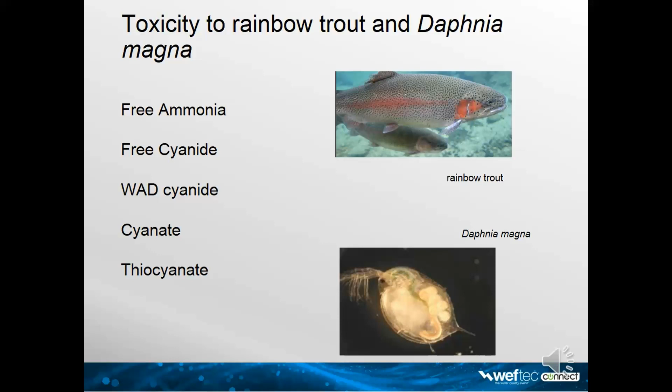This has two impacts. The first impact is that ammonia nitrogen, as we said earlier, is toxic by itself, so it needs to be taken into account when estimating how much ammonia nitrogen is going to be released in the environment. And the other impact is that it increases the load of ammonia nitrogen that needs to be treated. So this has an impact on the physical design, how big a reactor we must have to treat the ammonia nitrogen.

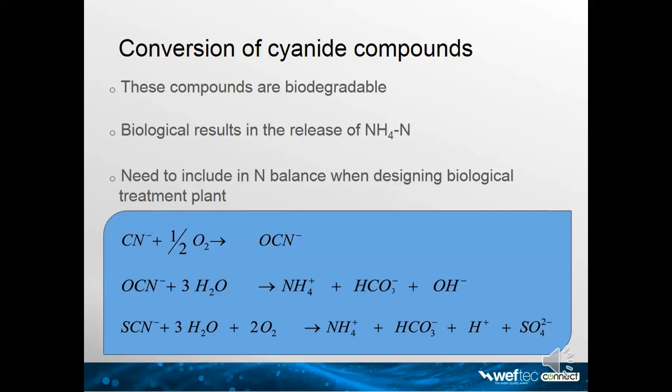In this specific case, the contribution of the cyanide compounds was roughly the same as the contribution of the free ammonia coming in the effluent. So basically, without taking this into account, we would have significantly undersized the reactor at the plant.

It was not immediately obvious when we were in the early phase of the project what was causing the toxicity of the water at Eleonore mine. There was an existing treatment plant. The treatment plant was removing metals. In this case, it was mostly copper and arsenic that were the two main metals present, and they were removed at levels way below the toxicity limits.

We started to suspect that ammonia was an issue. We tested at lab scale a biological process to remove the ammonia. We found that actually, yes, ammonia was a constituent of the toxicity. We found, however, that even when removing completely the ammonia, there was still some toxicity, mostly for Daphnia magna, the greater Daphnia. And we found that actually we needed to design the treatment system to remove both components to be able to remove that toxicity.

There were tests done using stuff like zeolites to remove only the ammonia. It actually worked fairly well, but because zeolites do not remove cyanate, at the end of the day we could not use that to actually make the effluent non-toxic.

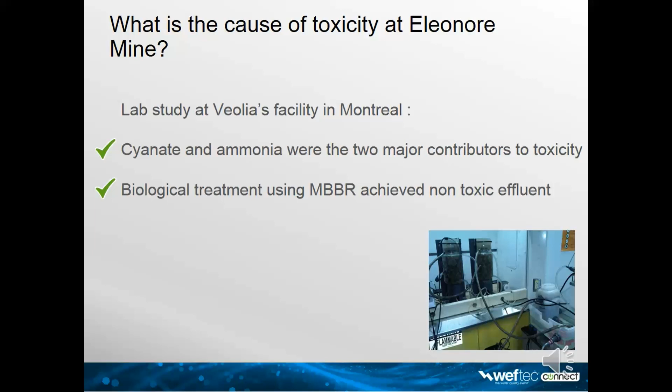On-site demonstration was undertaken for about 6 months, starting late fall, going into early spring. So we went through the winter season. We wanted to demonstrate that the process actually worked with variation in the water temperature and water composition as it is in real life. We demonstrated that we could actually treat the water at low temperatures.

And so we managed to demonstrate that once the media is seeded with biomass, the system is fairly robust and able to restart after unexpected upsets. That was actually pretty comforting for the client because he knew then that if stuff happened, they could restart fairly easily.

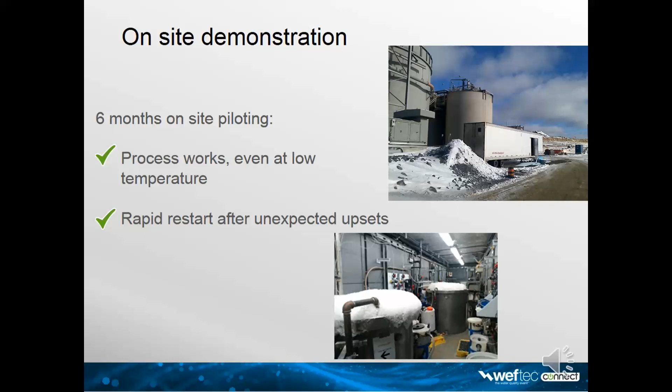The process at Eleonore that we implemented is a fairly simple process. As I said earlier, we already had a treatment system to remove metals. So it's high pH metal precipitation on the left side, which is mostly in this case copper, but would be also zinc and nickel. There's actually very little zinc and nickel in the effluent. It's mostly copper. And on the right side, there is a neutral pH metal removal, which in this case is mostly arsenic. The ore at the site does contain a fairly significant amount of arsenic, so it's something that actually needs to be removed.

We added provision to heat the water if required. That's both to increase the capacity of the system if it is required, and also to prevent freezing in winter, because this operates 12 months per year. So we installed a boiler and heat recovery using heat exchangers. And then we went with the two-stage MBBR. The first stage MBBR is to remove the cyanate and thiocyanate, and the second stage MBBR is for nitrification, to remove the ammonia.

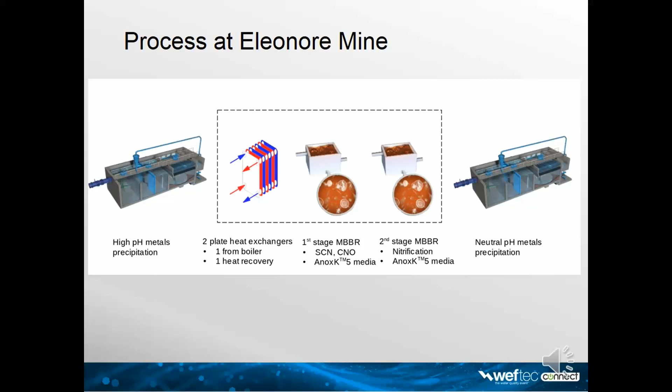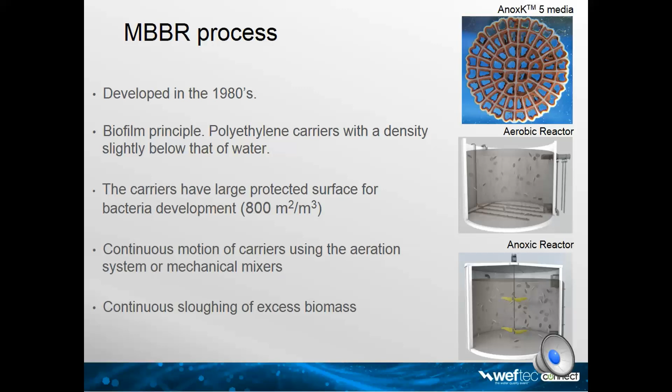Using fixed film technology allows specific bacteria to develop in each reactor. For example, we have nitrifying biomass in aerobic reactors and denitrification in anoxic reactors, and each biomass can operate under its optimal conditions.

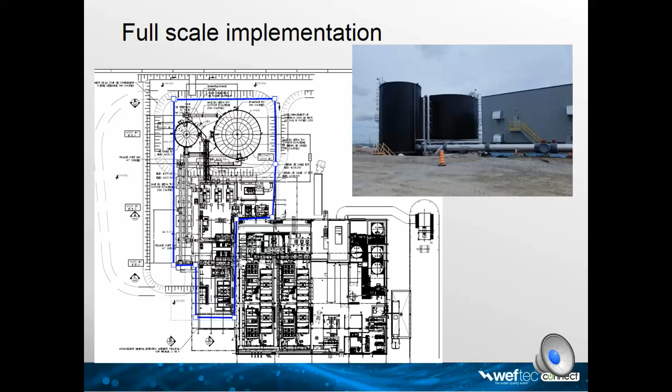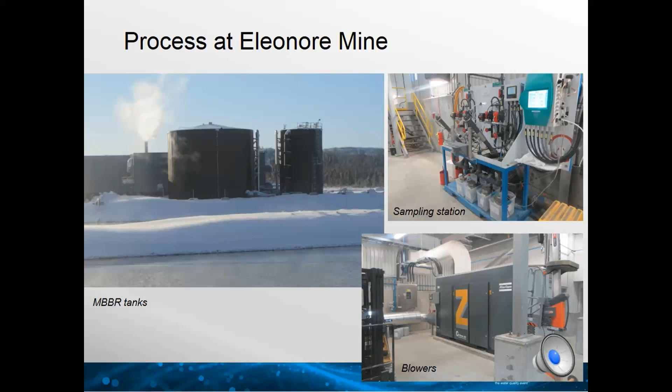There is an integrated automatic sampling station for process control with online instruments such as DO, pH, and turbidity. And there is also a multi-parameter analyzer for COD, ammonia, nitrate, and phosphorus measurement, which allows process monitoring. Of course, manual samples are also taken and analyzed in a laboratory. The blowers are situated in a building for additional weather protection.

Now to the operating results since commissioning. During the commissioning phase, starting in July 2017, we controlled the load to the plant by regulating the flow rate to progressively build up treatment capacity within the system. Although we did frequently have to operate on a batch basis to let nitrite oxidize to nitrate to avoid nitrite buildup in the system.

The average total nitrogen load being treated is around 200 kilograms of nitrogen per day, with peak loading of 500 kilograms per day, and this leaves sufficient capacity in the system to allow for the mine's future expansion.

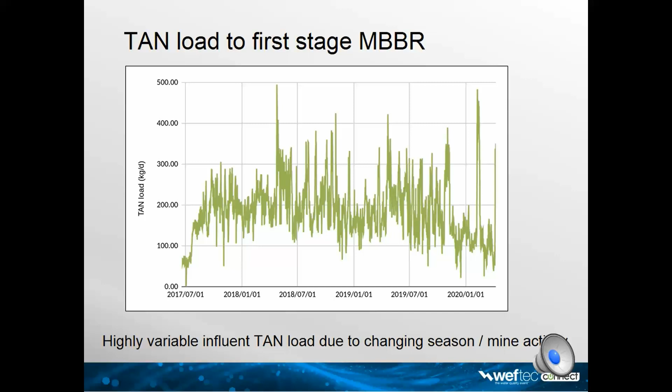In terms of temperature, the plant was designed for a minimum operating temperature of 8 degrees Celsius. A heating system was installed and was used during the first winter to ensure stable operation. It was also used to increase the temperature by a couple of degrees to boost the nitrification rate during peak loads.

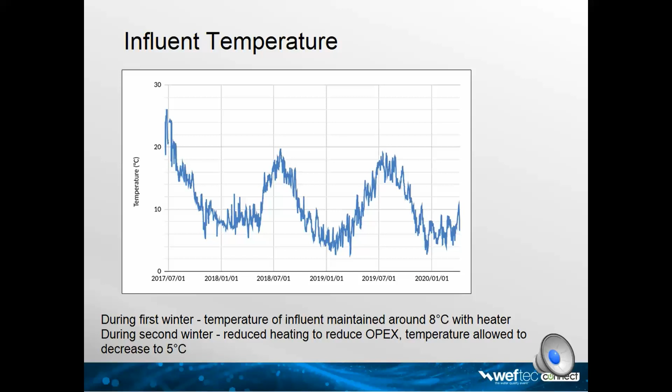To comply with local regulations, regular samples are sent to external laboratories for toxicity testing to rainbow trout and Daphnia magna. The test is carried out on a series of effluent dilutions, for example, using 25% of effluent in the sample, 50% of effluent in the sample, or completely undiluted effluent, 100% of sample.

The effluent is deemed non-toxic if there is less than 50% mortality of the test organism using undiluted effluent, i.e. you have to put 100% of the effluent and achieve less than 50% deaths.

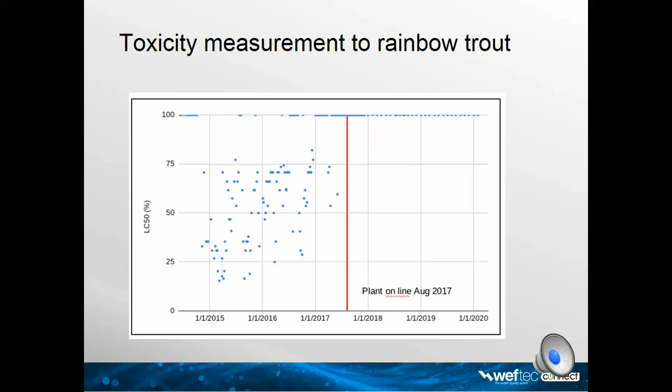Daphnia magna is more sensitive to cyanide. The cyanide removal did take a little bit longer to develop compared to ammonia removal. Hence, a couple of the samples following commissioning did come back toxic, but within a couple of weeks, everything was compliant and has been ever since, meeting the client's objectives.

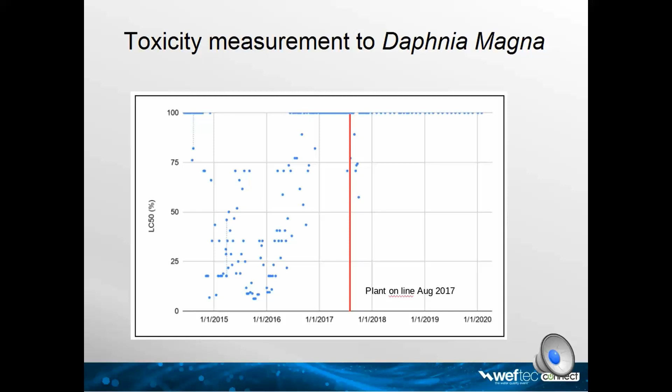The Eleonore Mine biological treatment plant is a success story. The introduction of a novel treatment process to rectify ammonia and cyanide byproduct discharge from the mine contributed to the award of the Global Excellence Award for Sustainability Stewardship in 2019. The MBBR process delivers robust and reliable treatment for effluent from cyanide detoxification plant. The effluent is consistently non-toxic for both rainbow trout and Daphnia, as required by the Canadian regulations.

It can, of course, be applied to other geographies, Peru, Ghana, anywhere where gold mining occurs. Of course, it's not limited to gold mining. Ammonia and nitrates are present in a lot of mine activities. Heating is not strictly required for biological process. Conversion of cyanide compounds and nitrification have been demonstrated at temperatures as low as 5 degrees. However, heating in northern regions is strongly recommended for frost protection. It can also be used to rapidly handle peak loads.

To conclude, biological treatment of cyanide detoxification plant provides a sustainable long-term solution for gold mines.

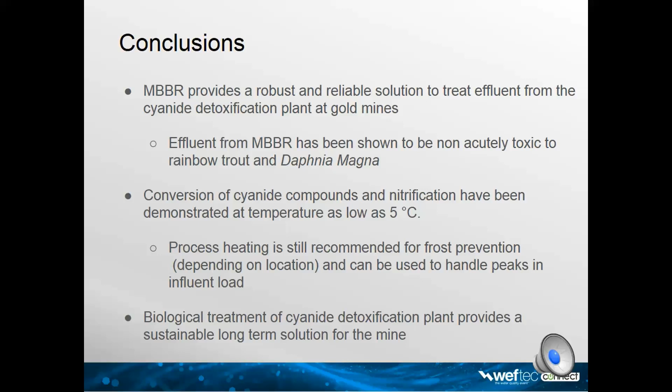Some questions for CE credits. True or false? Heating is required to maintain bacterial activity in the winter period. False. Biological treatment has been demonstrated to be successful down to 5 degrees Celsius, which allows the mine to send effluent without heating. Heating is, however, recommended for frost protection.

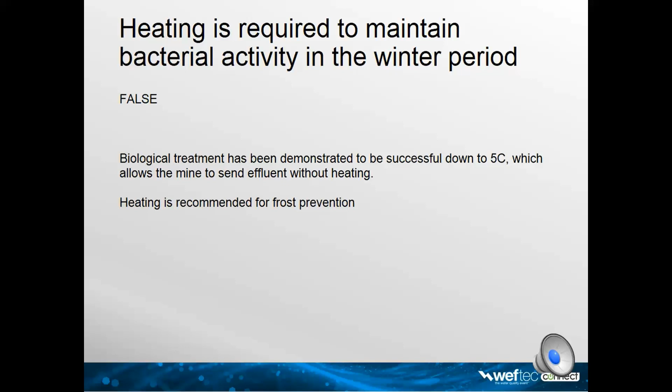True or false? Without specific treatment, cyanide compounds accumulate in the tailings and result in toxicity to the receiving environment. And that is, of course, true. Since tailing water is recycled to the concentrator, cyanide compounds concentration steadily increases during the lifetime of the mine unless specific treatment is applied.

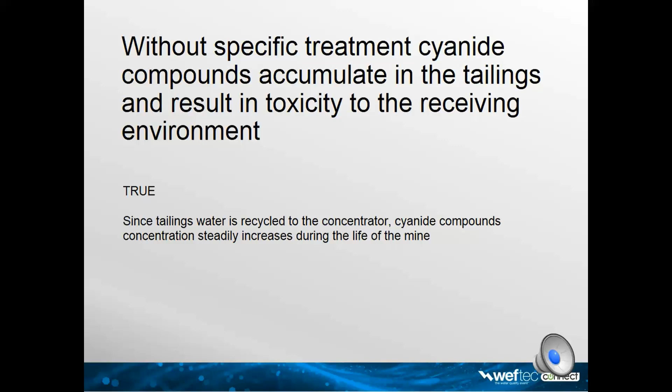Hello all, this is a presentation on the performance of a full-scale MBBR system for biological removal of complex nitrogen compounds. The nitrogen compounds were coming from a cyanide detoxification effluent at a gold mine in northern Canada. I'm Marc Laliberte. I'll be presenting the project and the context, and Caroline Dale later on will be presenting a bit of theory on MBBR and the results for the full-scale process.

Timeline. Very briefly, the mine site is called Eleonore. It's in northern Quebec, as shown in the map there. It's fairly high up in latitude. Gold was discovered at the Eleonore mine site back in 2003. The project underwent a number of studies and impact studies and so on. Construction was started and the first gold was poured in 2014. The plant started full production in 2015, and as soon as the full production started, the effluent started having issues with toxicity. As we'll see later, toxicity is one of the criteria that must be met in the effluent.

It wasn't immediately obvious what the causes of the toxicity were. We had to do studies to identify the toxicity causes. Biological treatment was identified in 2016 as a solution. That was confirmed by piloting and everything. Construction was started, and in 2017 the new treatment plant was commissioned. And since late 2017, after commissioning was completed, the effluent discharge has been fully compliant with local regulation. The results we'll show later on will present the results from 2017 to the middle of 2020, at the time at which we are recording this video.

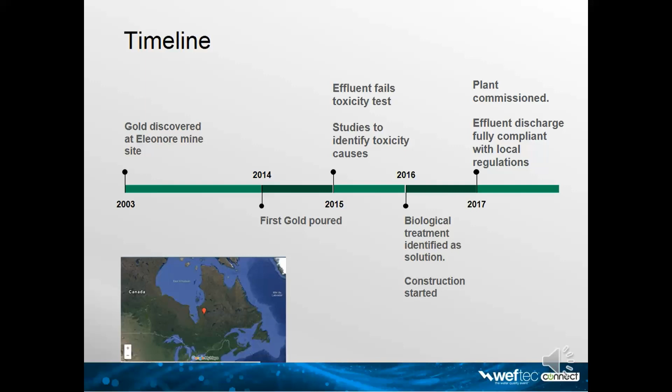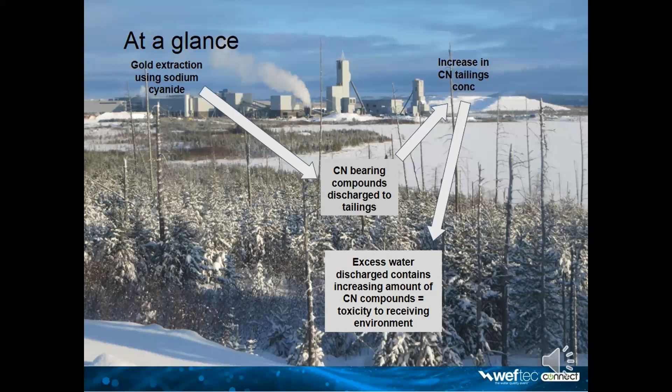At a glance, basically, the mine is extracting gold using a sodium cyanide solution. The cyanide compounds are discharged to tailings. This is mostly cyanate coming from a cyanide detoxification process and thiocyanate. This led to an increase of cyanide compounds, not free cyanide as such, but cyanide compounds in the tailings, and the excess water that is being discharged contained increasing amounts of cyanide compounds, creating some toxicity in the effluent.

Regulation. In Canada, we have both federal and provincial regulations. They are in this case fairly similar. So for